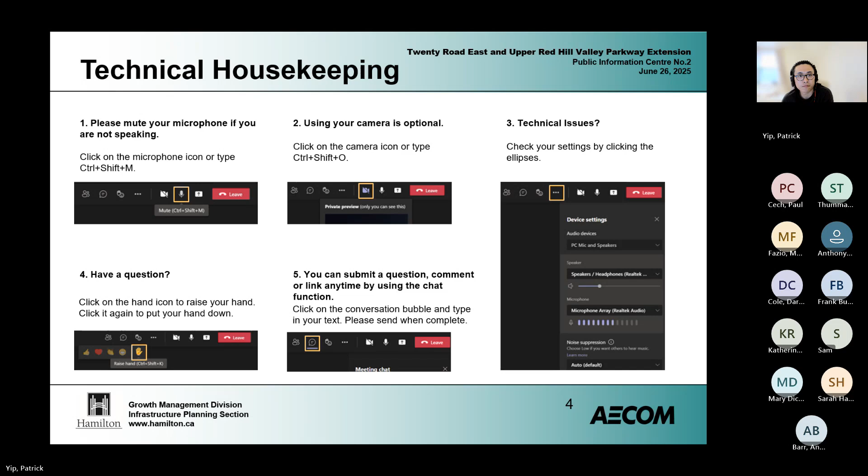I'd like to introduce the project team. My name is Patrick Yip. I'm the project manager from the City of Hamilton's Planning and Economic Development Department under the Growth Management Division, and within that, the Infrastructure Planning section. And with me, I have our consultant who was hired by the city to conduct the study. I will pass it to Andrew Barr, our project manager from AECOM, to introduce himself.

Hello all, my name is Andrew Barr. I'm the civil manager within the Mississauga office of AECOM, and I'm the project manager for this study. Over to you, Paul.

All right, thanks a lot, Andrew. Good evening, everyone. My name is Paul Cech. I'm an environmental planner here at AECOM, working on this project.

Thank you. And we also have a couple of City of Hamilton team members with us in this meeting as well. I'd like to call Margaret to introduce herself. Hi everyone, it's Margaret Fazio. I'm the Senior Project Manager of Infrastructure Planning in the same section that Patrick works. So I'm here to support him in this project.

Thank you. We also have Darlene Cole from Real Estate Department as well, if she could introduce herself. Oh, she might not be there yet, but we'll talk to her soon. And we also have Spriha from... Darlene, you unmuted yourself. Thank you. Good evening to everyone. I'm Darlene Cole, and I'm a senior real estate consultant with the City of Hamilton.

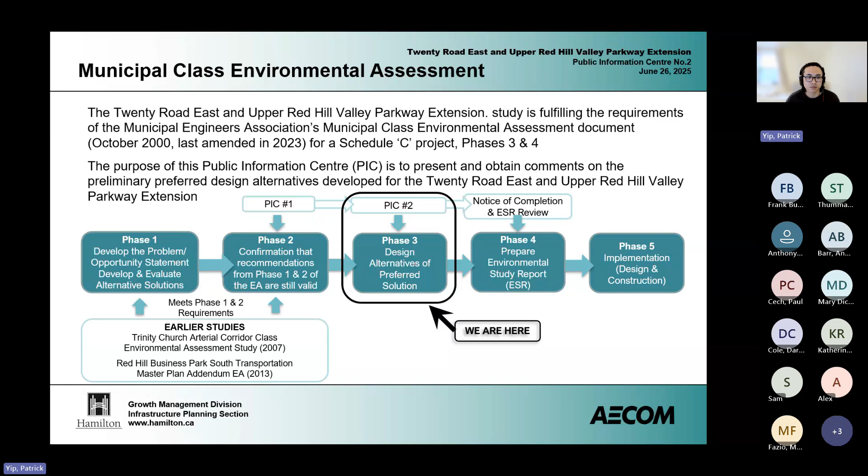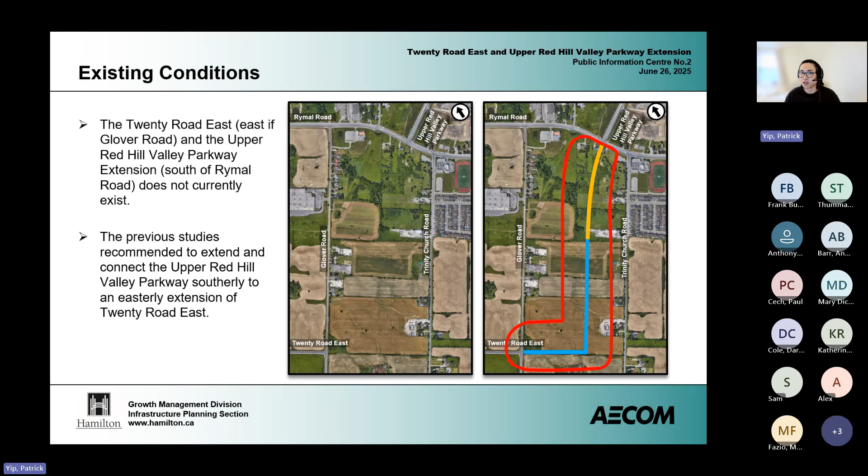As you may be aware, there are currently no roads that exist within the study area. The recommendation from the previous study is to provide a connection from the Upper Red Hill Valley Parkway and Rymal Road intersection down all the way to the 20 Road East and Glover Road intersection.

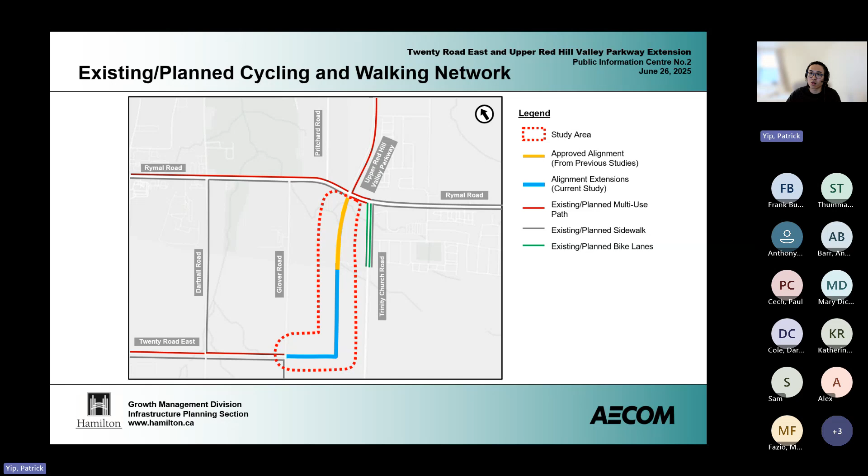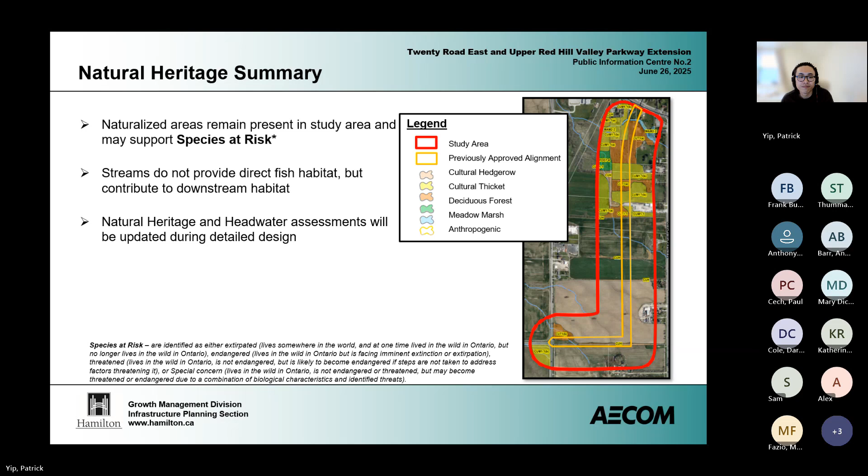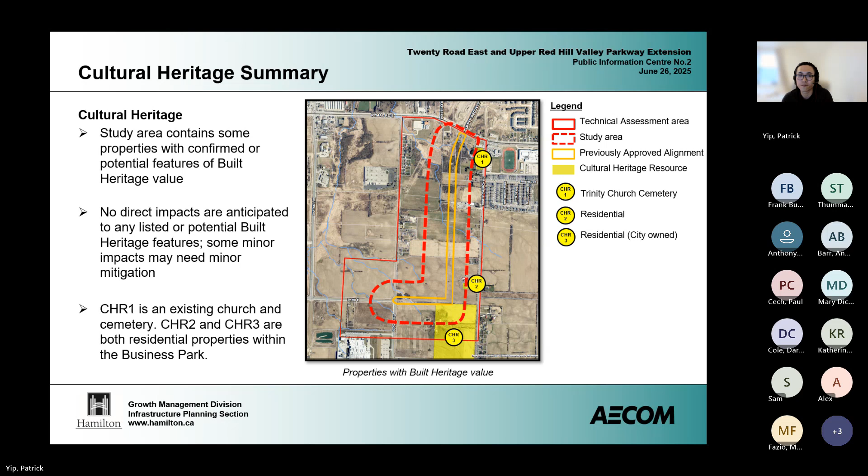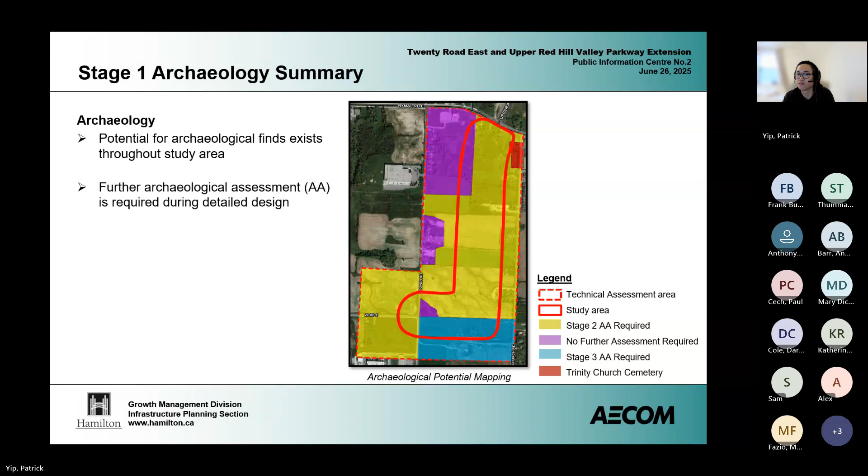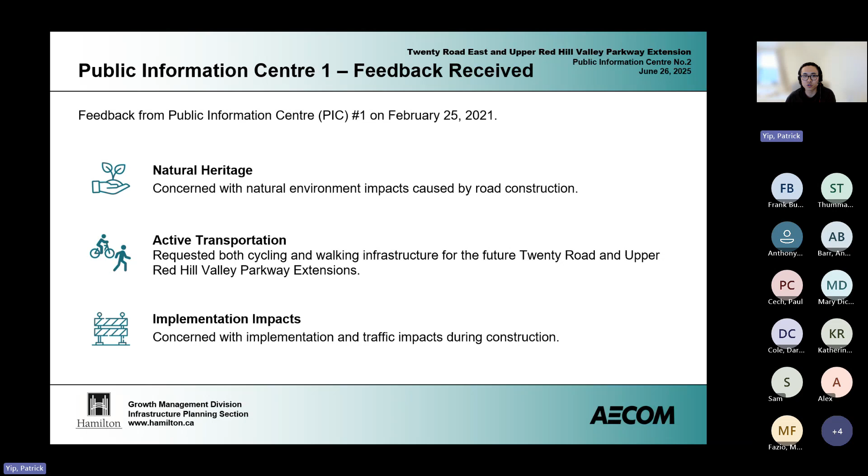The following were some concerns brought forward by the public during PIC number one. First, the public was a little concerned about the potential natural environment impacts caused by the road construction. Second, the public wanted both cycling and walking infrastructure for the future road extensions. Third, the public is concerned with traffic impacts during construction.

Now we will go into the design alternatives that were considered. But before that, this is the evaluation criteria for the design alternatives. This criteria will help us identify and evaluate the preferred alternative to move forward with. Within this evaluation criteria, these are some of the criteria we look at: the first is transportation, second is socioeconomic, then cultural environment, natural heritage, engineering, and cost.

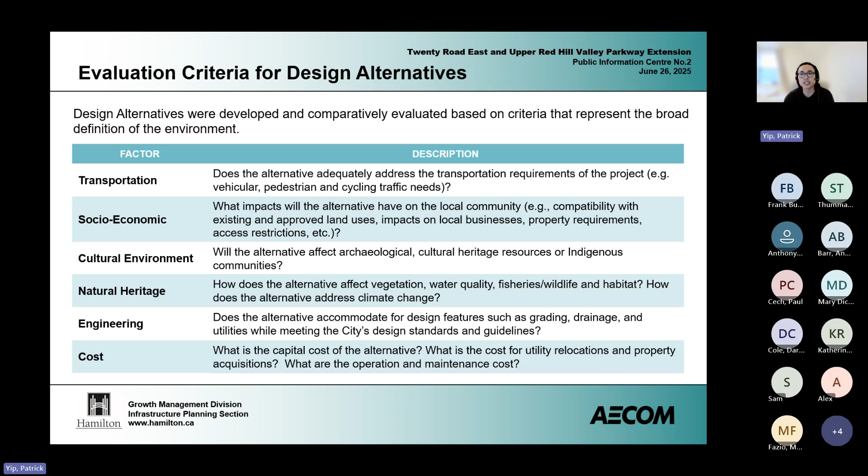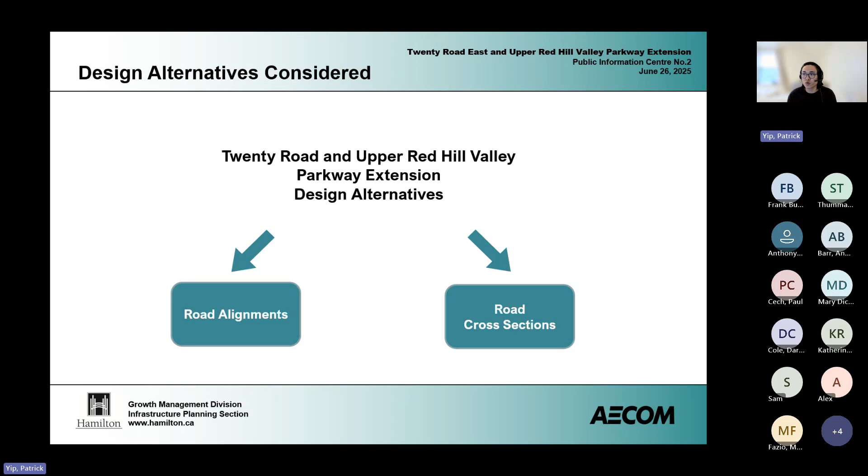Since we have a pretty long list of design alternatives to go through for this study, we will break it down. The first alternative we'll look at is road alignments, and the second is the road cross-section alternatives.

Starting with the road alignment, we considered two alternatives. Number one is from the previously approved study: a straight, 90-degree perpendicular road from the future Upper Red Hill Valley Parkway over to the future 20 Road extension, with a proposed roundabout. Number two is the optimized land use alignment, where from the approved alignment we introduce curves to place the road and roundabout equidistant between Glover Road and 20 Road.

I would like to note that the curvature from the Upper Red Hill Valley Parkway and Rymal Road connection is the same down all the way to the existing hydro corridors, the same between alternative 1 and alternative 2. The only difference is the curvature introduction here.

Based on the evaluation framework, it was determined that only one criteria made a difference between the two alternatives. Criteria like transportation, cultural heritage, natural heritage, and engineering costs do not have significant differences, whereas socioeconomics does. Alternative number two optimizes for potential land development south of the hydro corridor, and so we've identified alternative number two as the preferred alternative for road alignments.

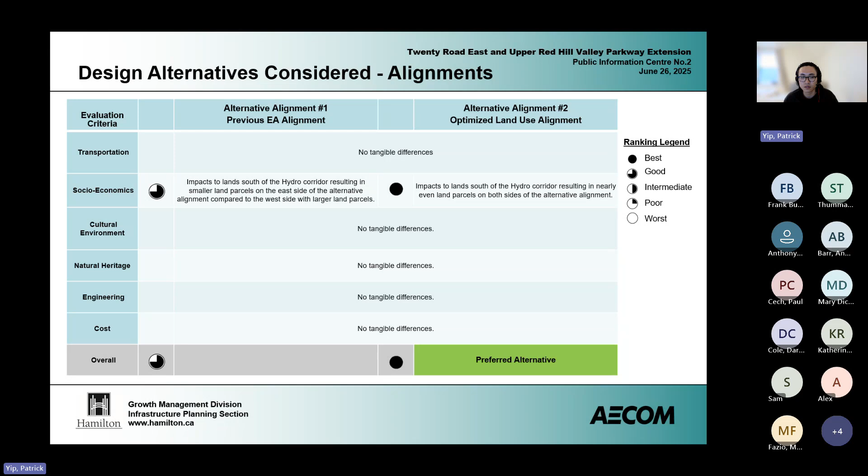This is just a detailed explanation of what those criteria look like.

Additionally, the preferred alignment will have a multi-use path connection, as you can see in the green here, all the way to Trinity Church. This multi-use path connection from the roundabout over to Trinity Church Road is above the existing city easement, so there are no additional property impacts anywhere else - it's just on top of the city's owned easement.

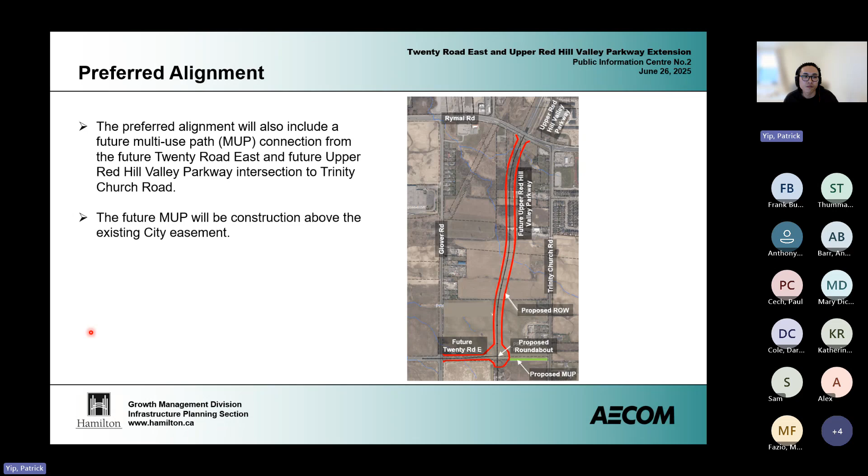Now, on to 20 Road East cross-section alternatives. This is all based on the preferred alignment alternative that we just mentioned. We came up with three cross-section alternatives for the 20 Road East extension.

But before I get into that, I need to explain what this number means: 27.48. The right-of-way was identified as a future collector as per the Urban Hamilton Official Plan, with a future right-of-way of 30.48 meters. This decimal number is actually a metric conversion from 100 feet. Since there were already active developments adjacent to where we were going to put this 20 Road East extension, we had to reduce the future right-of-way down from 30.48 to 27.48. That is why this number is shown here.

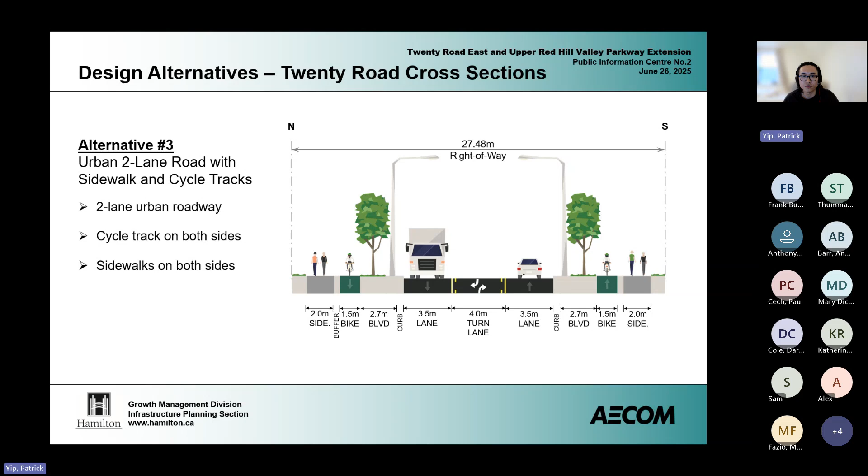The third alternative is an urban 2-lane road with separated bike lanes and sidewalks that are within the boulevard and away from the road. As you can see, separated.

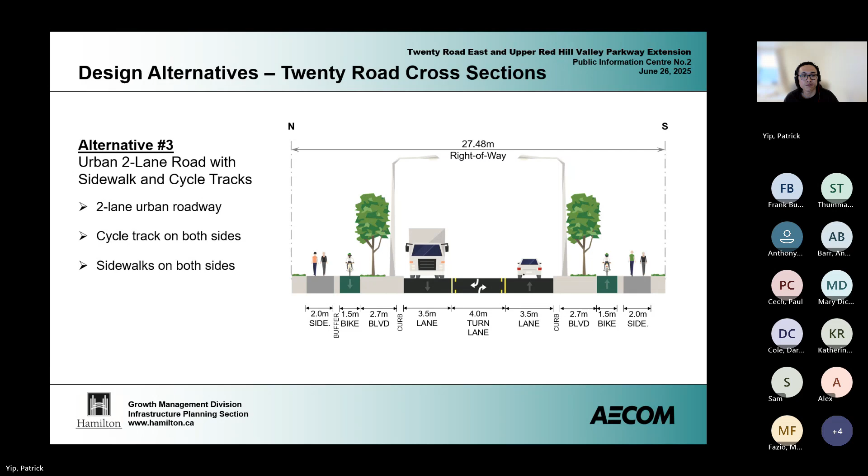Based on the evaluation of these three alternatives, there were three criteria that made a difference: transportation, socioeconomic, and cost. The placement of the multi-use path and sidewalk away from the road is much more preferred. Alternatives 2 and 3 represent better safety for pedestrians and cyclists. The on-road bike lane would take up space for a potential left turn lane, restricting traffic flow for future left-turning vehicles.

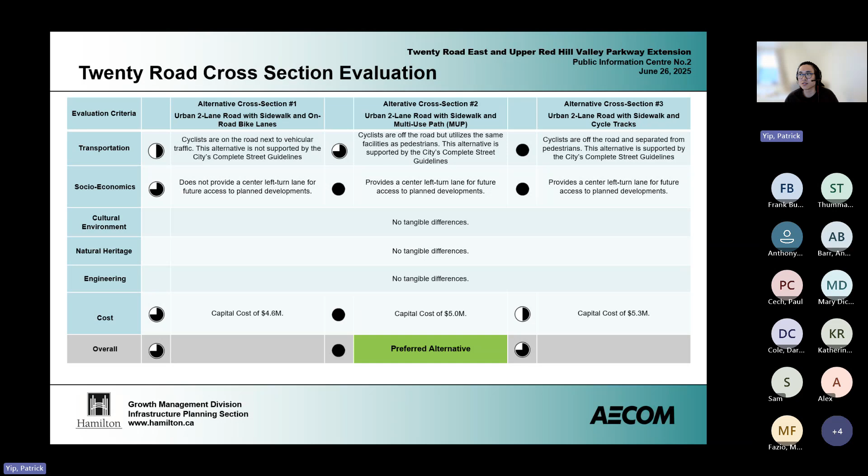The capital cost for alternative 2 is about $5 million, which is between alternatives 1 and 3's capital cost. However, alternative number 2's maintenance cost is comparatively lower, having only one sidewalk and one multi-use path to maintain. That is why we've selected alternative number 2 as the preferred alternative for the Twenty Road East extension. Here are some of the details of the rationale as well.

Moving on to the Upper Red Hill Valley Parkway cross-section alternatives now. But before I get into that, I'd like to preface this by saying all the alternatives you're about to see are built for 2 lanes, but are actually protected for a 4-lane cross-section, because the city is not sure how fast development will come into this study area. We will start off with just 2 lanes of traffic and protect for 4 lanes in the future. The city expects the proposed 2 lanes of traffic to be built and in place for approximately the next 20 years.

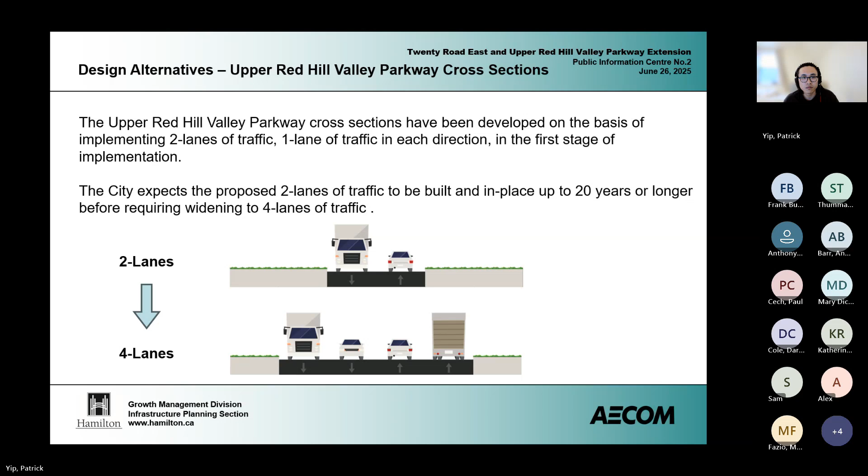For the Upper Red Hill Valley Parkway cross-section, we have 4 alternatives. Again, I'll mention that the Upper Red Hill Valley Parkway extension was identified as a future arterial roadway per the Urban Hamilton Official Plan, with a future right-of-way of 45 meters, which is comparatively wider than what was identified for Twenty Road. The first alternative is a rural 2-lane road with a multi-use path on one side.

This alternative is consistent with what the previous study's recommendations were, and that is why we're bringing this up as a consideration.

The second alternative is a semi-urban 2-lane road with a sidewalk on one side and a multi-use path on the other side. There are ditches with green infrastructure considerations on both sides of the road, and there's also a center turn lane, or we can have medians, depending on the location and the future development parcels that may come in.

For the third alternative, this is very similar to what was shown in the previous slide, but the only difference is that the sidewalk is now further away from the road and closer to the future property line. Everything else is the same.

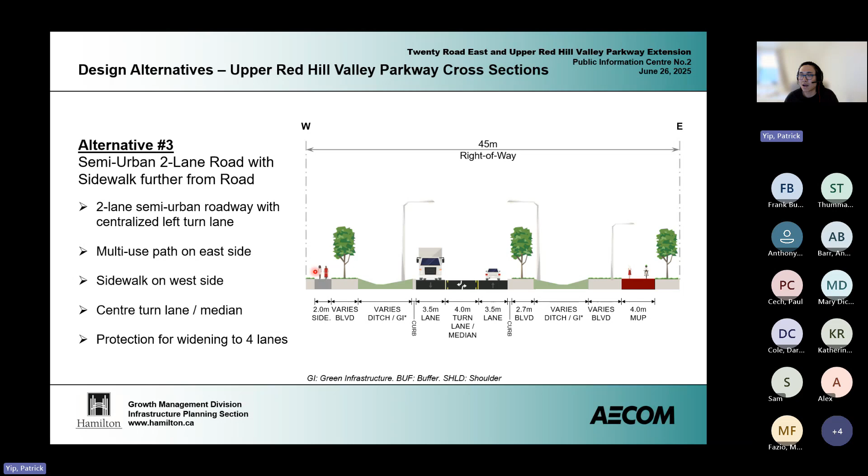Alternative number 4 is a semi-urban 4-lane road with a median ditch in the middle. This alternative pretty much builds out the full 4 lanes in advance, but we will hatch 1 lane in each direction until development and the anticipated growth comes into the area. The median ditch is an extra consideration for drainage purposes.

Based on the evaluation, the differences are in the transportation, socioeconomics, and cost criteria. For the transportation criteria, alternatives 2, 3, and 4 have additional sidewalks for continuation of the pedestrian network, whereas number 1 only has a multi-use path, which is limiting.

For the socioeconomics criteria, alternatives 2 and 3 have immediate access to development lands because they have a center turning lane, whereas alternative 4 would require some reconstruction because it has a median ditch, and does not have immediate access, but can provide a center turn lane through a little bit of reconstruction. For cost, alternative number 2 is the lowest capital cost at 16.5 million compared to the other alternatives.

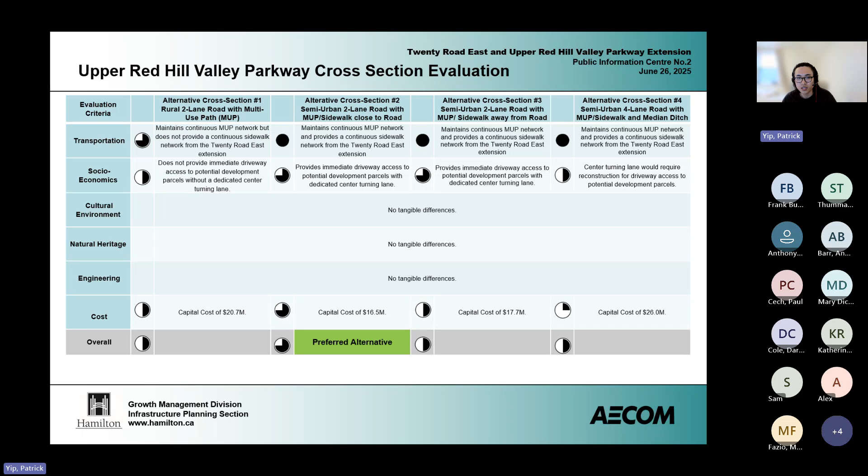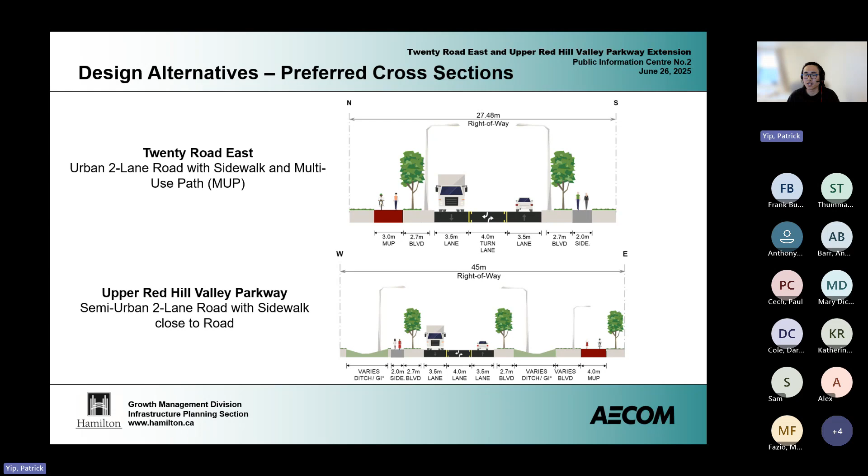Again, similar sort of rationale details here. These are the preferred cross sections for both the Twenty Road East extension and the Upper Red Hill Valley Parkway extension, as a summary slide showing the cross sections.

We did consider intersection alternatives for the connection at the future 20 Road East and Upper Red Hill Valley Parkway intersection. Based on the future implementation phasing, the future connection to the Airport Employment Growth District, future traffic flow, pedestrians, cycling and vehicular safety, and the available lands we have, a roundabout is the pre-screened preferred alternative for this location when compared to a typical signalized intersection. So a roundabout will be right at this intersection.

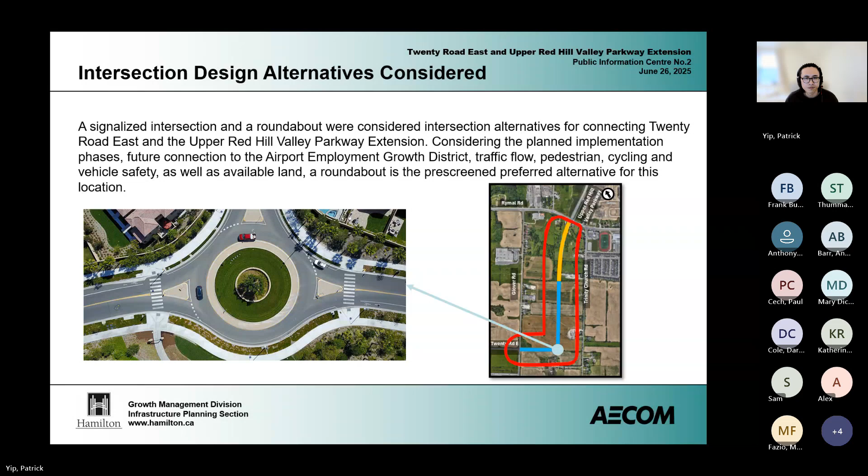The other intersection at Glover Road and 20 Road East was also looked at. This is an unsignalized intersection with stop control along Glover Road, so there are stop signs on Glover Road.

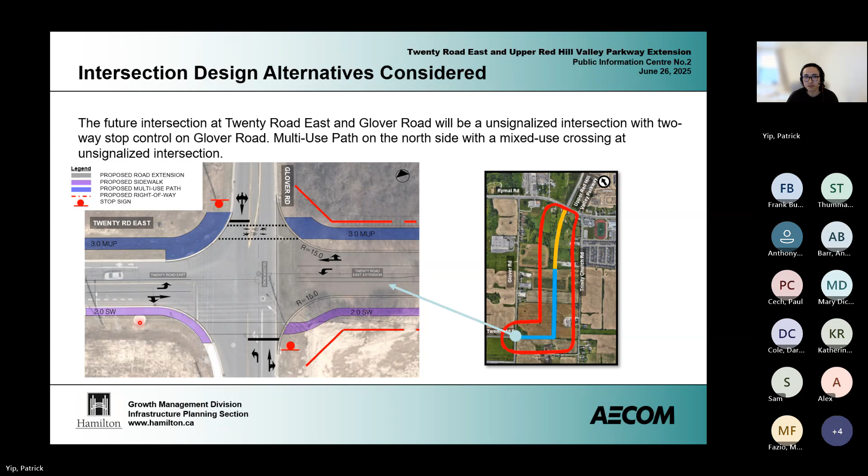First, the city would like to go through what we call a willing buyer, willing seller methodology, where if you're willing to sell, the city's willing to buy and we can negotiate. Or number two, we could go through expropriation, a process where the city will purchase the property at fair market value, determined through property valuation at the time when the property is needed for public use. If you're not a residential owner but a development-owned property, then land will be acquired through development.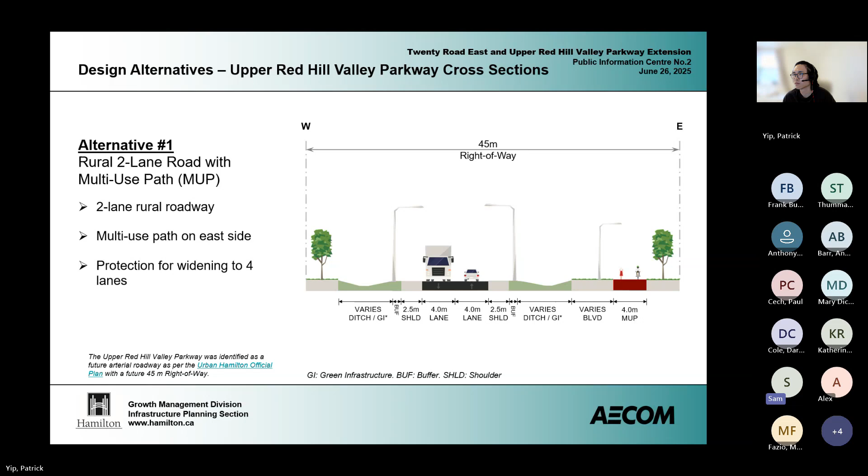Okay, I've just unmuted, can you hear me? Hi, my name's Sam Marenka, I'm a citizen in Summit Park, bordering on Trinity Church Road. My only concern is that I don't know why 20 Road cannot be extended that other half mile to Trinity Church Road. The reason I say this is because there's a huge bottleneck at Rymal and the upper Red Hill extension, and if you open it up, you'll disperse a lot of the traffic and it won't be a bottleneck down at the bottom end there. My second reason is that I know in future development they want to build Elfrida in behind the power lines, right behind our subdivision.

There are no plans for any expressways at all in there, which makes traffic even worse. And if you open up that 20 Road, you can continue that 20 Road through the back end of that Elfrida stretch. Those are two main reasons I even came to join this tonight. I think it's imperative that 20 Road is not stopped with a little roundabout. It needs to continue to Trinity Church. So thank you, Sam, for that.

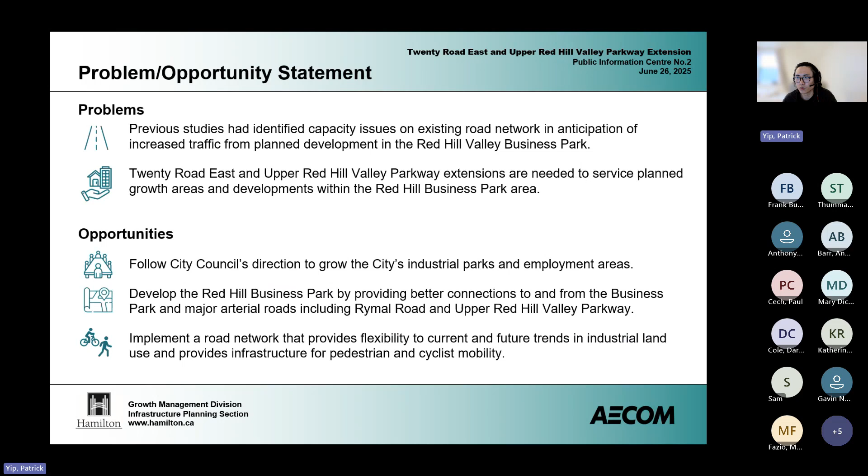Understood, Anthony. So I just want to bring everyone back up to speed: there is a future plan for the connection from Upper Red Hill Valley, Rymal Road, all the way down to the future extension of this airport conceptual link, which another department within the City of Hamilton is currently conducting, hoping that would alleviate some of these traffic concerns so those trucks do not have to go through either the 20 Road East towards the west side. Totally understand the concerns. Right now we're focused on this connection, this L-shape, backward L-shape connection, but there is another study that another city department is also conducting to help look at these traffic issues as well.

And I believe Gavin has his hand up as well. I'm sure he's going to chime in.

Yeah, thanks, Patrick. Just to that question, I think everybody's noticed that traffic on some of our rural highways, they're not really highways per se, but they sometimes seem to operate that way in terms of the amount of traffic that expects to use them. I wouldn't expect you're going to see a whole lot of change there, but this particular project is providing access to the park. The intent is not to provide access through the park to other places, but to that point Patrick brought up, the city is looking at the feasibility of an Upper Red Hill Valley Parkway link to the airport. It's a study that's just in its infancy in terms of getting started, identified in the city's transportation master plan. This is going to be a feasibility study, but if it ever gets built, or recommended and approved, it would take several years, more than several years, to see something like that get built.

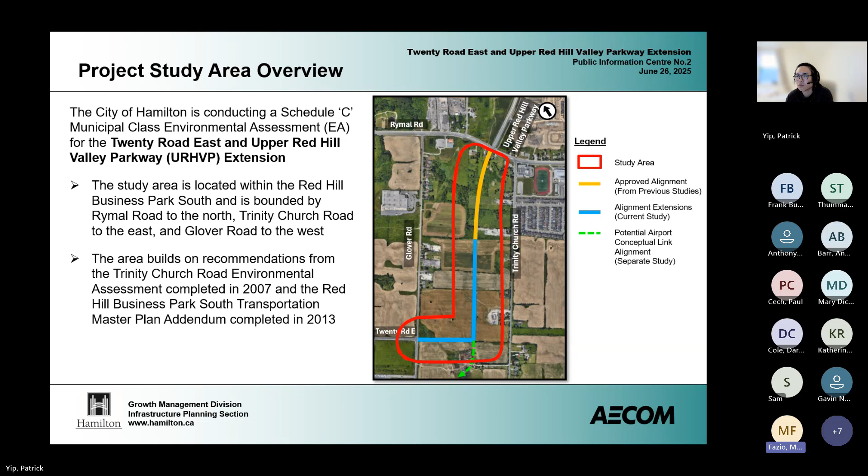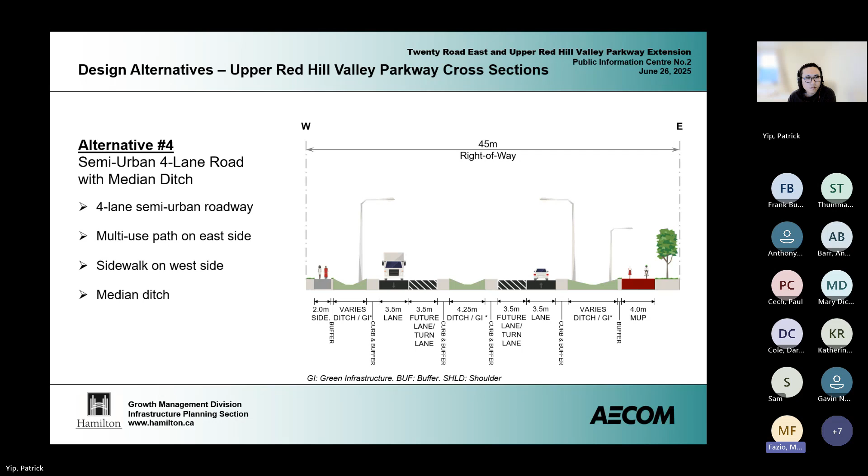Patrick, I'm just wondering if I can add something. Sure. No one's raised this issue, but I wanted to point out the pedestrian and cycling connection that was considered. Can you share the screen again for the cross section with the temporary cul-de-sac? I think that's the best view of it.

You're not sharing your screen fully, all I see is a little spot of it. Can you share it so it shows? It might be zoomed in, Margaret. Oh no, I'm just looking at it - I see everyone's view. Oh I see, yes, gotcha, sorry. Okay, so you see in purple.

I know someone was asking about having this as a full traffic connection, and I think Gavin was answering that, but the purple line where it says proposed sidewalk is actually a proposed multi-use path. The intention is that when there are places to work, even the residents along Trinity Church will be able to use that connection. So if you have teenagers who don't want to drive, or anyone else who wants to use active transportation, we've provided an active transportation network. These are complete streets we're designing, so it's not just for truck and vehicular traffic, but also for those who don't wish to or don't have to use vehicles to get around. I'm not sure if that was emphasized enough, but we are considering all modes of transportation and are sensitive to the Trinity Church residents who were quite vocal about not wanting truck traffic on their road before. That's all I wanted to say.

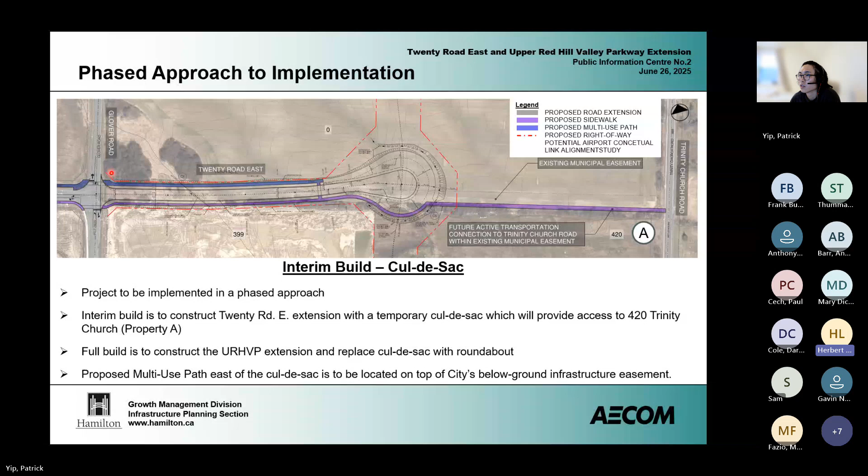My question specifically is on the 20th Road extension towards Red Hill Parkway. Will there be provisions for a driveway into the UPS site from the new proposed 20th Road? Sorry, which land parcel are you at? We're at the corner of 20th and Glover Road. Which quadrant? North, I'm assuming, not northwest, right? The northeast quadrant? Northeast, correct, part of the Demic property, right? Yes. No, it's southeast. Yeah, it's kind of hard to tell the direction on that side. So 399 Glover Road, correct. Yes. Is there access onto your property from the 20 Road extension? Will there be access, like a driveway or some sort of access to get onto 20th Road directly from that UPS site, from 399? No, I don't think so, because we reviewed your development application. There wasn't any proposed driveway at that location. Oh, I see. Okay. No, we didn't, because we weren't sure how long this development was going to take.

Yeah, okay, but there is a provision for acquiring access from new roads. It's just a process you got to go through, but it all depends on your site layout. I don't know if your site layout at UPS ever considered a direct access to 20 Road, because a plan for 20 Road has always been in place. So when you developed your site plan, if you anticipated that road, you might have oriented or configured your building such that there could be access in the future. And if you could have access in the future, that's just part of an application you'd make to the city to build that. I don't think in the application itself I see an access, because you're quite high in elevation at your site, and I see a lot of retaining walls too. Yeah, that's right. There is a retaining wall on the northern lot line of 399 Glover, and the proposed access was off of Glover Road itself.